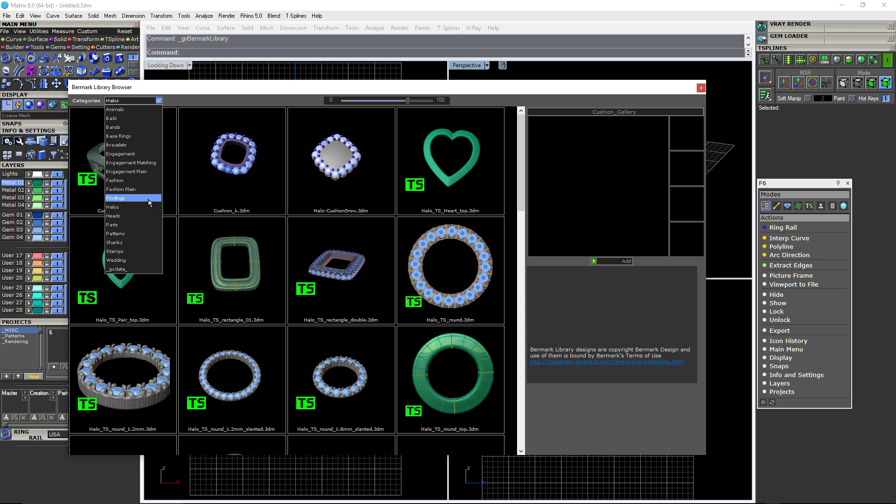So there we go, I have a library. I choose my shanks library and I'm just going to choose a random shank here. Usually I can find one that fits the design I'm trying to make, and if I don't, I'll just make a new one and add it to the library.

First thing, you pull it out and it'll come out probably the wrong size, so you'll have to go in, zoom in, select it. I'm just trying to see what size the other one is. But basically you select it and scale it. Sometimes I'm not as exact like this.

I just scale it to be as close as it can be. Or you can get, like I'm doing here, the right ring rail and scale it from one point to the other. So there we go, just delete that ring rail and it's the right size.

So usually on my shanks I will pre-save selection sets. For example, after you scale that to the ring rail, sometimes the outside thickness will be too much or too little. If I save a selection set on the outside or on the edge, I can easily just scale it up and down and it'll thicken it or not. So it's a quick way of doing it.

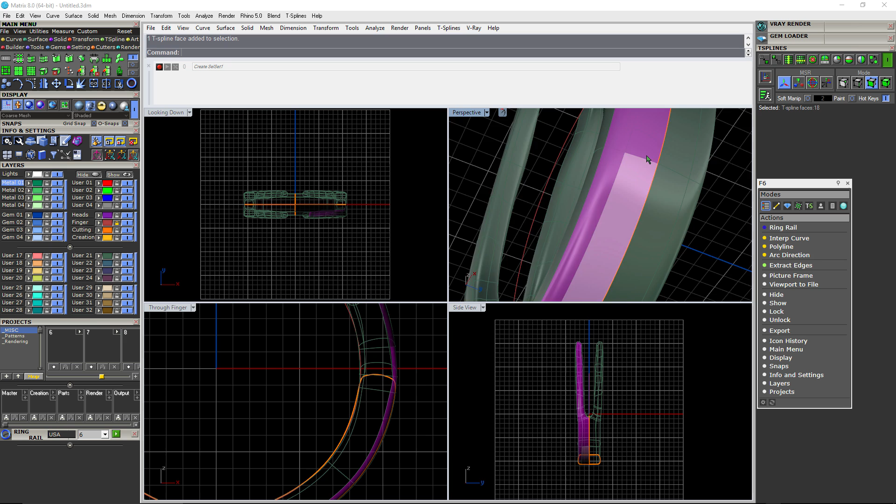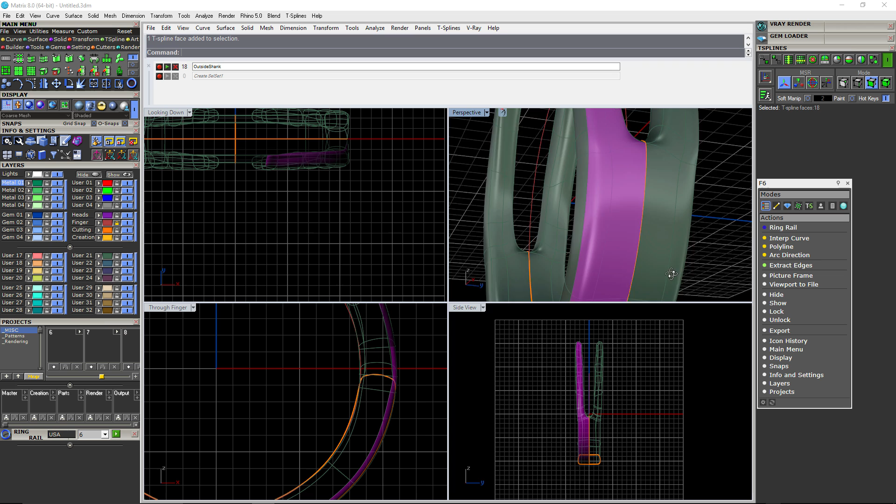As long as you save those, you can pull them out and they'll be with it forever. Or it just takes a minute to redo it if you didn't ever save any. So here we go, just saving it, naming it. Now you just have to go back and push the play button and it reselects it.

So in this case is where I should be scaling it. I'll do a 3D scale or a 2D scale, and usually pull it in. I always have a handy shortcut for measuring, so I can always just do a quick measure of how thick it is. There we go, and hopefully that's good. Let's see, next I'm going to do the selection set.

Oh, never mind, I'm going to pull out a center stone. Usually I'll start out with the center stone before I even pull out a shank, but I'm a little out of order today. So we'll pull out a stone, just something to work around, see what we can do here.

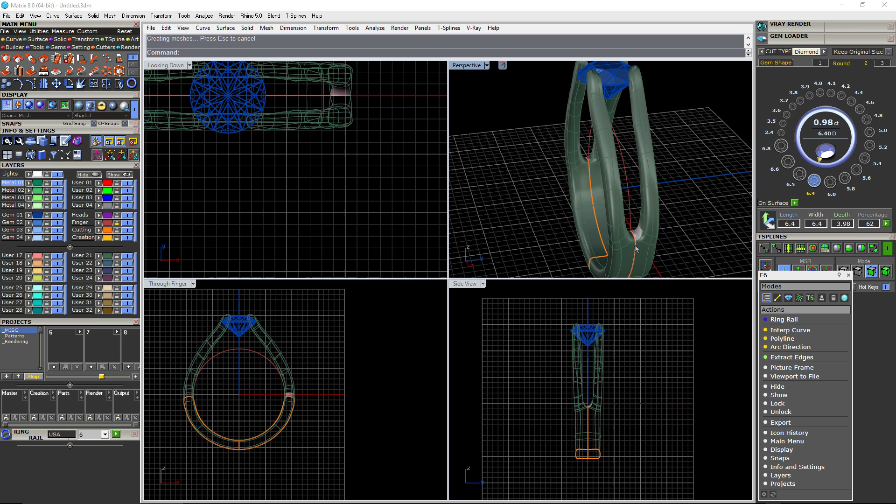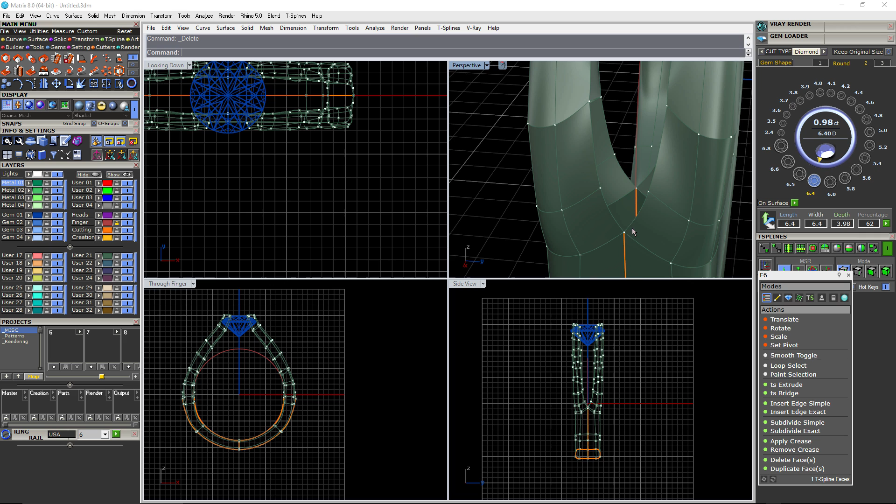Just showing that you can actually take this, and if that groove was in the wrong spot, you're able to select these points, delete surfaces, and then weld these points together. And then it'll just pull it up higher. And then boom, you have that.

And you can just do it so there's a little space between them, or pull that groove way down further. Now I'll go through and show you how to lengthen it. Just select, probably just delete that. You only need to do one side. Don't know why I selected both, but...

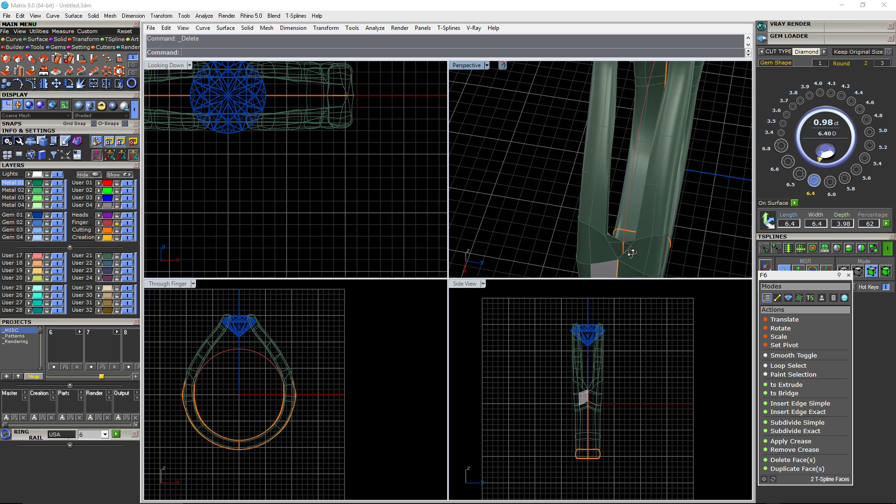This part, because it was connected here, didn't want to come apart, and so I tried a few different ways of unwelding it. None of it worked. What finally worked was just unwelding the edges, not the points. So just give me a minute here to figure that out.

Okay, there we go. Now I'm getting to the edges. Okay, now you can just pull them apart. Another way, instead of deleting that, I could have just taken the edges from the beginning along that symmetry orange line and just unwelded the edges, pulled it apart. Probably would have been a lot quicker and easier. Now I have to go back through and add a surface there.

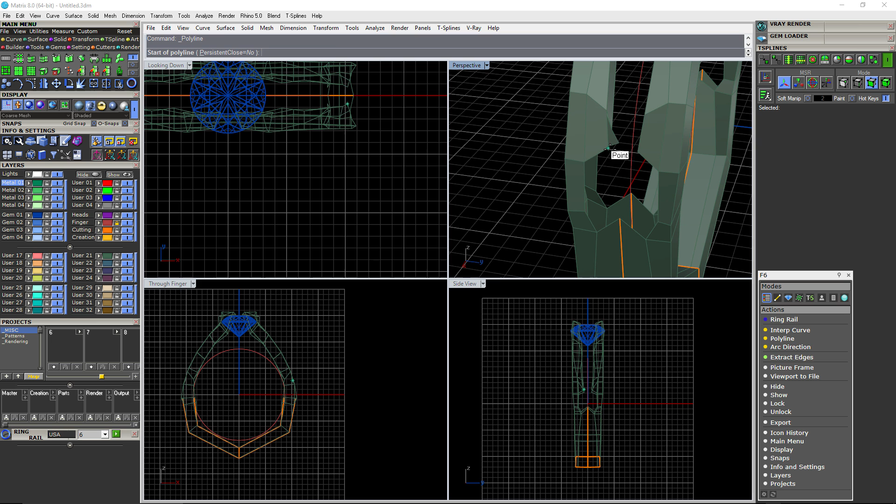Sometimes, oh, this one, yeah. I think I was a little confused here. How fun, how fun.

When I just sit there and look at it and stare, I'm just kind of thinking and trying to figure it out. So what I sometimes will do, if there's multiple surfaces I'm going to append, I'll just draw a line and then I have something to snap to when I'm doing that, so it's not like in midair. There we go, and then you can delete that little line after. So I'll have to draw another little line here.

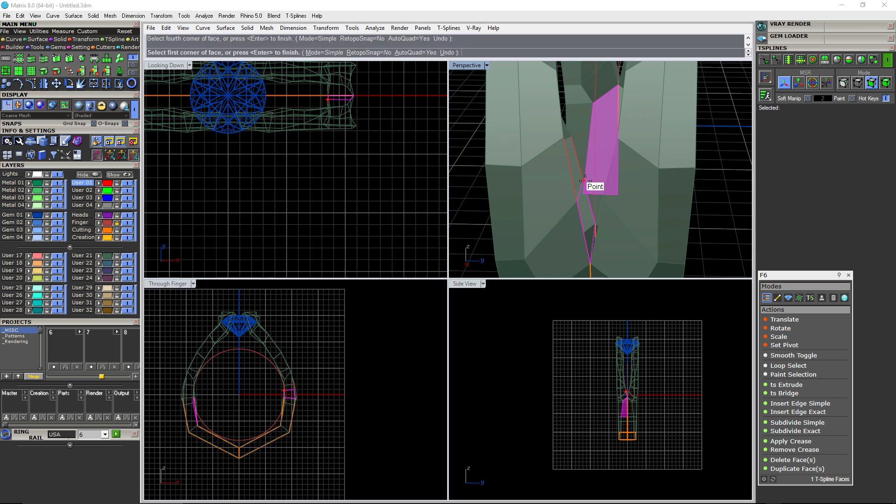The next part's easy, just seal up the next section and then the last. There we go, smooth it out. So you can pretty much bring that groove up and down as far as you need it. Next, I think I'll just add some stones and maybe a bridge. Probably the bridge. Let's see. No, I'm going to thicken it.

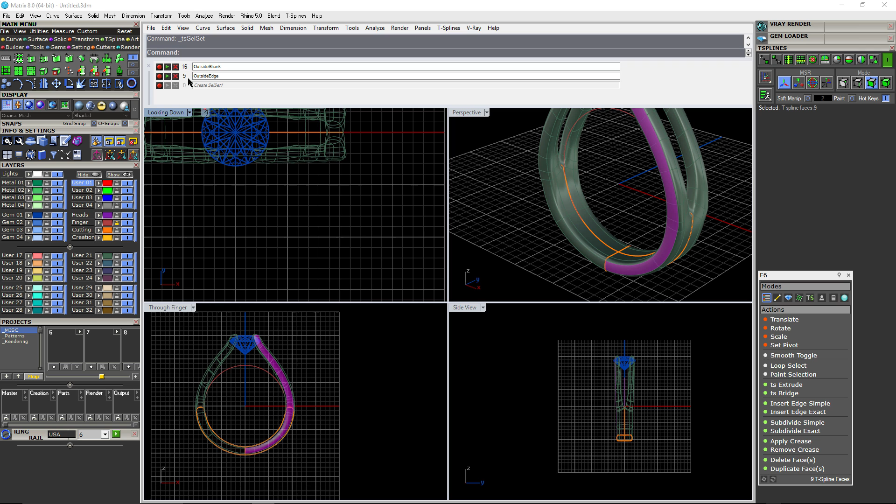So, like I said here, take the edges, save the selection set, open it up, push record, name it. Just going to name it edge. Let's see. Nope. That works. Okay, so take it, select it. I'm gonna export it back to my Bermark library.

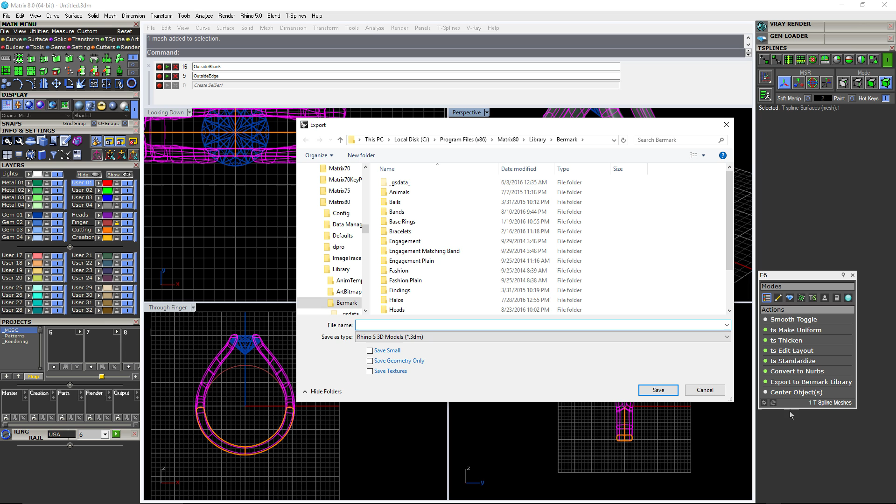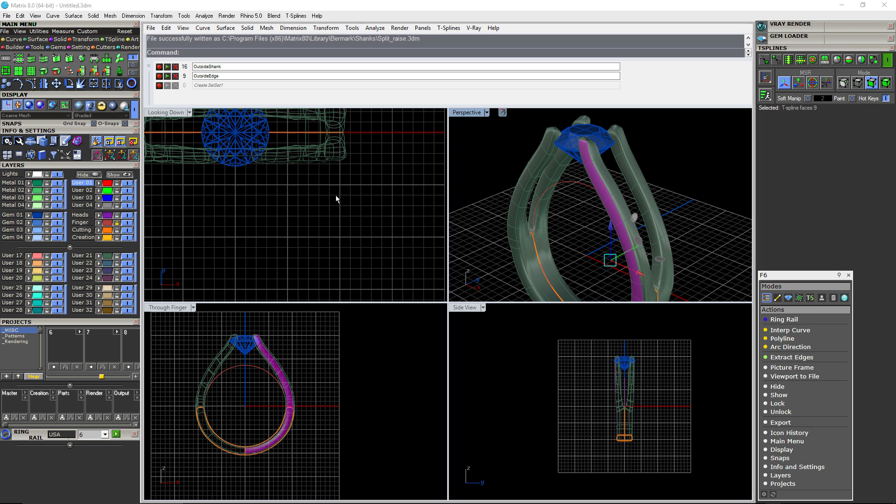Now, in those settings, you can actually tell it where to bring up your library. I already have that set up. So anytime I have a T-spline selected, I can just select it, push export to library, then the Bermark library, and then I can select what folder I want it in. And that's where I store all my library pieces. It's a great way to keep things organized. I wish they would implement that into Matrix without our little workarounds, but I'm glad I can do the workaround. Saves me.

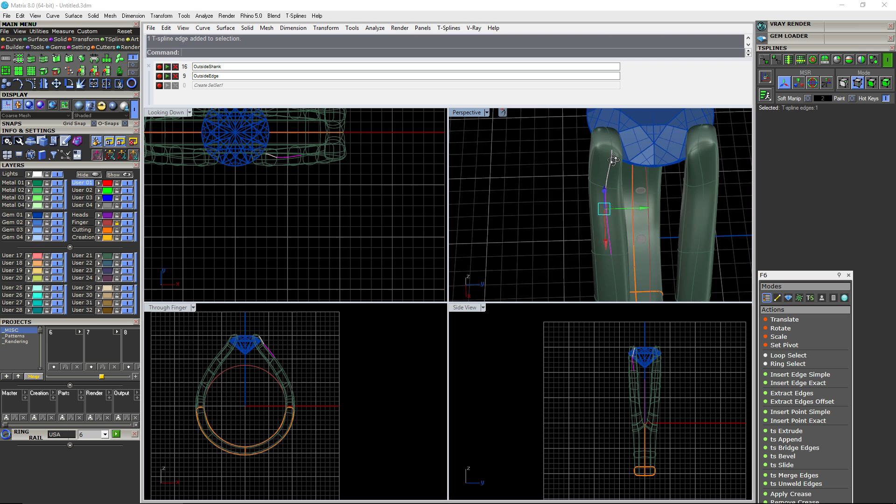So there we go. Now you can just pull that out, thicken it. Taper that a little, try to straighten things out. Little detail work. And that's the fun thing with T-splines. You can just pull it, push it, get it to where you need it. Selecting edges is always great. In this case, I'm just doing small adjustments, but if you need to, a lot of the time I'll just select one edge, hit L to loop it around, and then you can adjust the whole area around. But right now I'm just kind of doing edges.

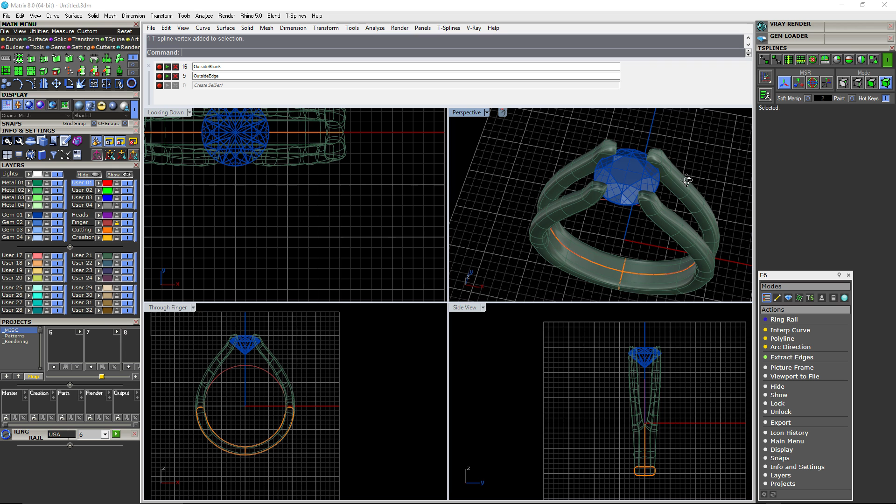Since I'm going to be adding stones, I'm trying to get that center line right there in the middle, because that's where the stones will go. I'm just going to use it for a guide since it's not quite perfectly in the center. Sometimes they are, and you can just roll with it, but in this case I'm going to extract the line and then rebuild it and adjust it where I need it. Kind of going back to the top area now, but I'll get to that line, I promise.

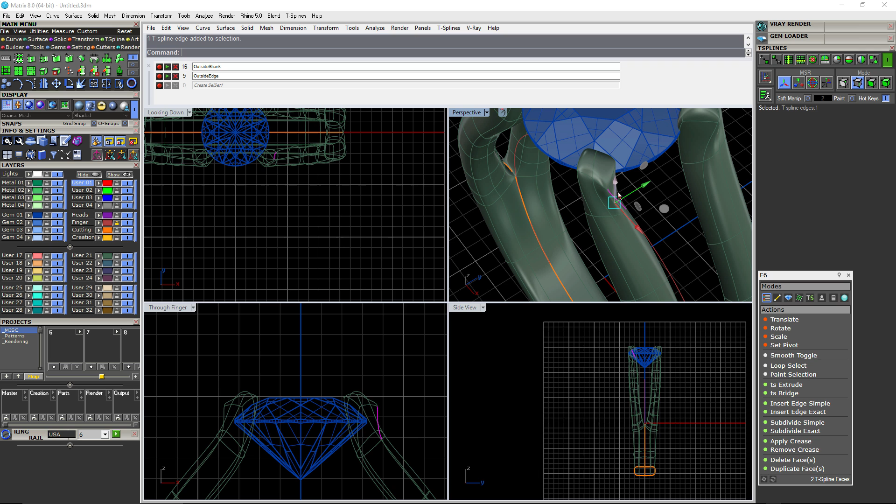Okay, let's take that and probably just twist it now. So it kind of twists up, lands flat up on the prongs. There we go. Adjust the top, make it nice and neat. If it gets all wonky and it's not perfectly how you want the prong, you can keep adjusting and playing with it, or not care, or just make it taller and whack off the top, however you want.

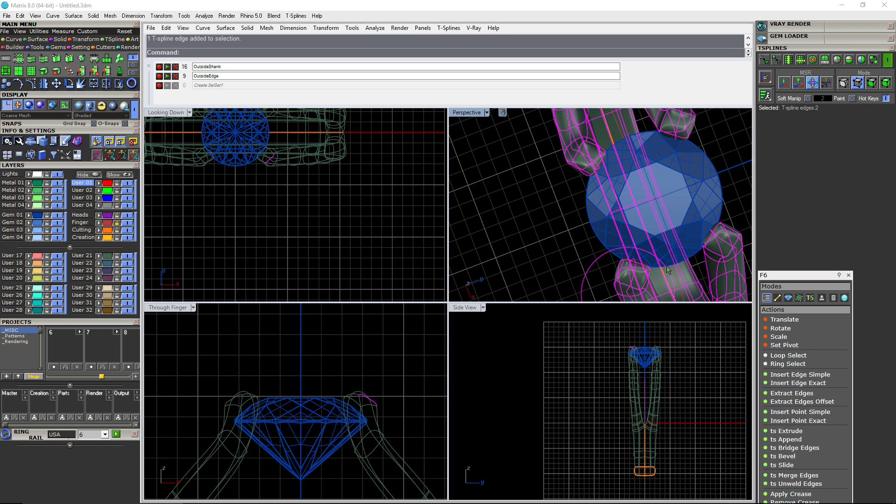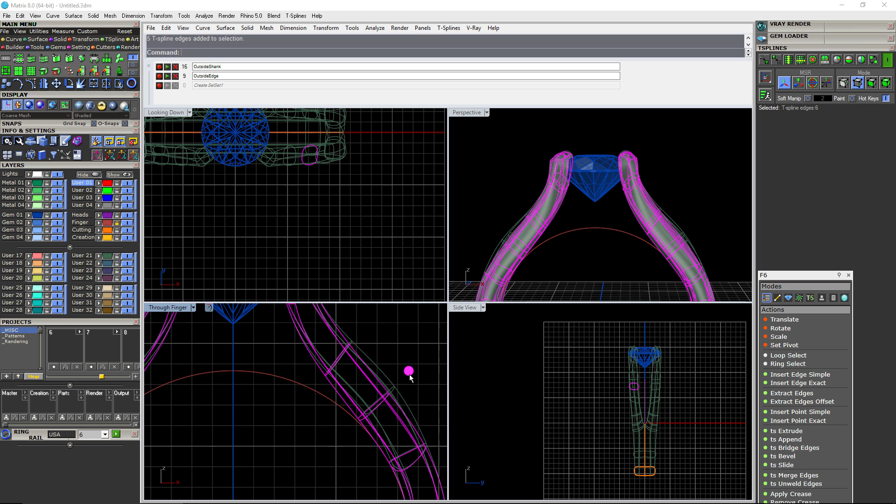If you're really picky too, it's possible, even after you're done with the ring, if you have like ZBrush or something, to bring it over there and just sculpt the top a little bit and make it exactly how you want it. Very flexible if you can bounce between programs. But in this case, I'll just show you this adjustment. So there's where I select it, push L. And then now I can just adjust that. Same goes with there. Pull it in.

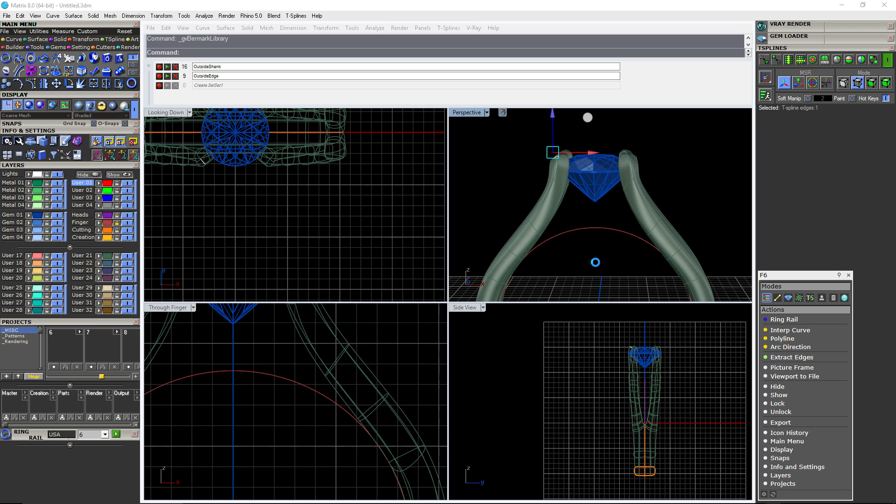Now what's missing? The bridge. Let's go back into my library. Go into my parts library. And I have a bunch of different bridges available. Since this is kind of slanted outward, I'll use my double bridge. And it's already close to in range. This one, not sure if I saved my selection sets on it.

But usually when symmetry is on two separate pieces like that, you can't just select it. It'll select both pieces, so you have to select just the surfaces. So I'll probably lock that green side so I don't select them. Then I can just select the surfaces on one side since it has symmetry on, and then I can scoot it over.

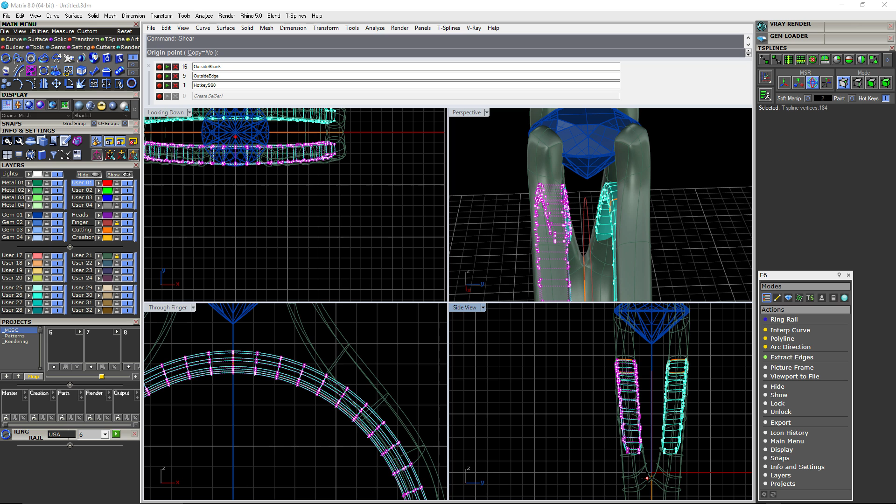There we go. And the best way, instead of rotating, because that'll cut into the ring rail, the best way is to do that. Turn on the points, take off T-splines for a moment. Type in shear, and then you can select up and then just shear it whichever direction you need it to go. That way it'll keep the inside ring rail pretty even and clean. And just turn on T-splines again.

I always like to work in the darker green and blues and those colors. Usually I always use those colors instead of the middle 1s and 2s, which are the bright greens. Just easier on my eyes.

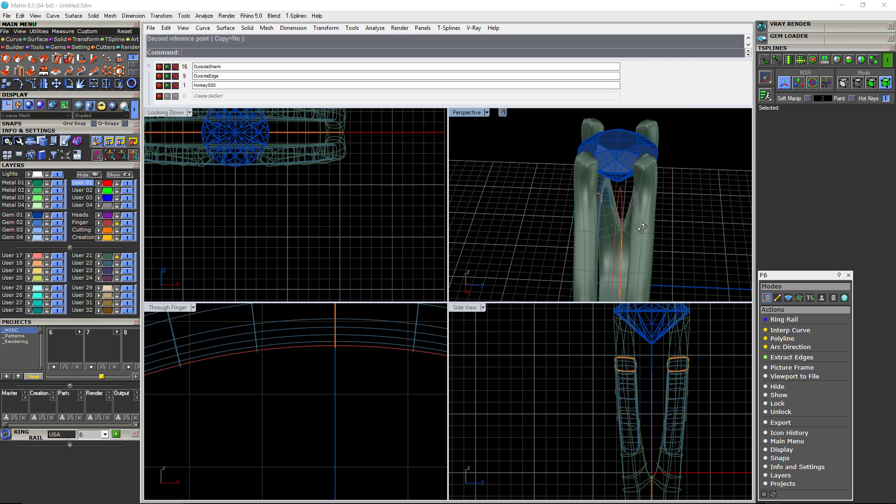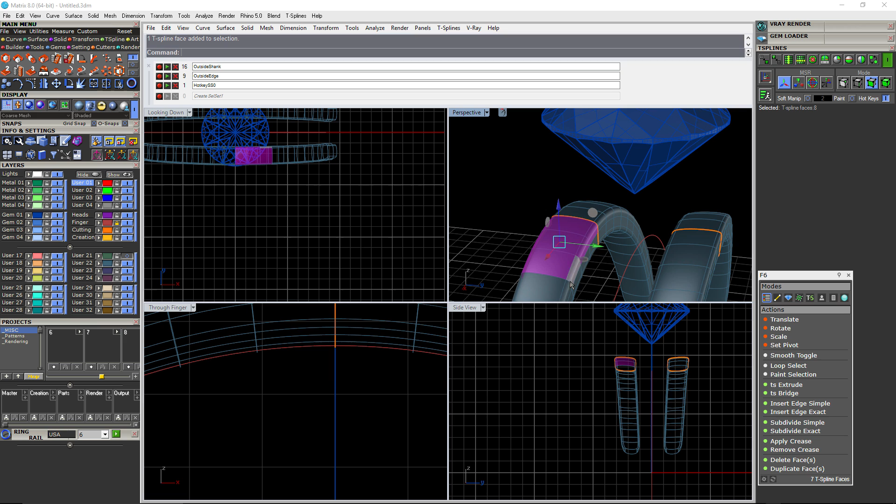So yeah, here we go. See if you needed to thicken that bridge. See if I have it. Nope, I only had one selected. So yeah, I need to go back through my library and pre-save these. But for now, since I don't have it, I'll have to go through and manually select it again. So I'm just going through, selecting the top half. And remember, save your selection sets. That way you'll always have them and you won't have to keep doing this. It saves so much time.

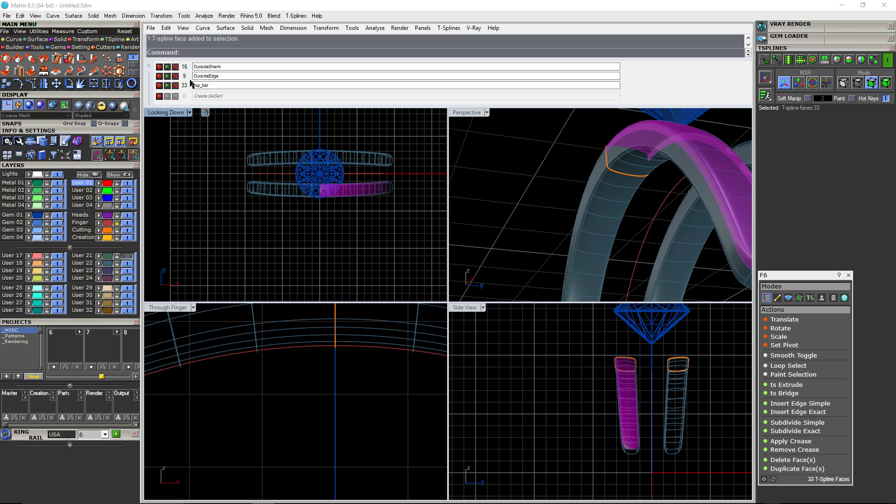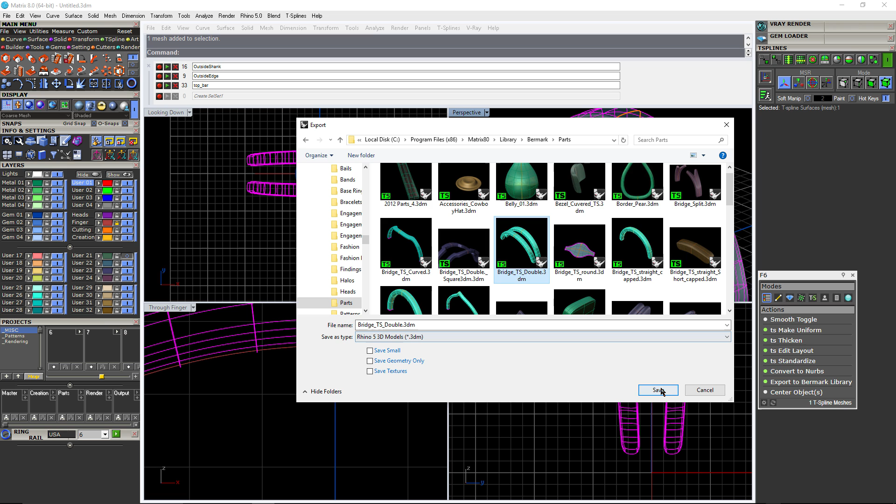So there we go. Save it, name it. I'm gonna save over it. That way I have it saved for now and for always. There it is, just save. There. See, it's been a while. I had to convert it to Rhino 5. It's been a while since I've re-saved over that.

So now we've got that. You can just scale it. So like check the thickness. If it's not the right thickness, just do a 2D scale up or down, depending on how thick you want to have it. And then you just go through and recheck the thickness and you're good to go. It's probably good for this demo. I'll pull that on, got that going.

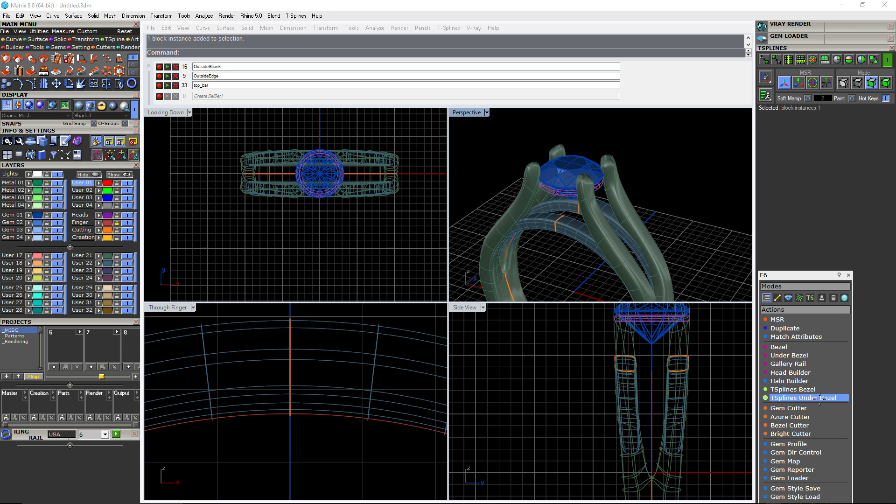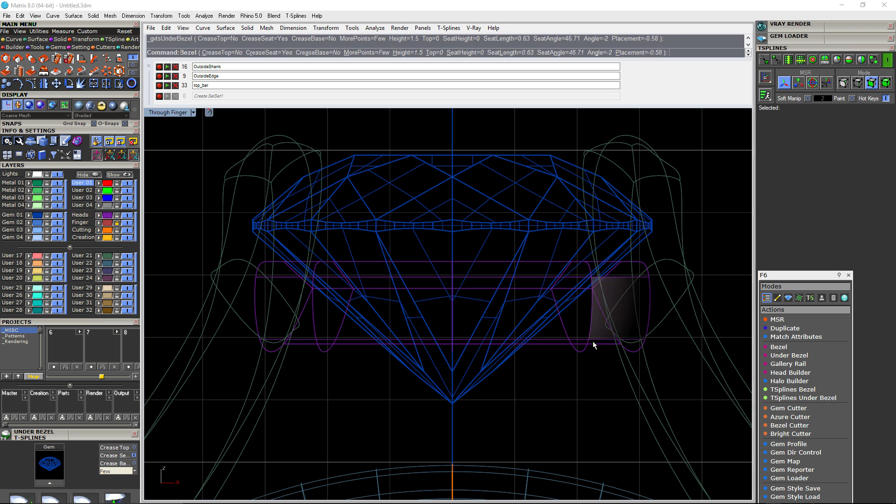Now that needs a little under gallery, so we're going to use the T-spline under bezel here. And the good thing with T-splines is it's so easy to adapt even after that. It's just like the head bezel builders and all that, but you have a little more freedom. So don't worry if you want it more rounded or if you want it sharp on some edges, you can easily tweak it to do that. So I'm just trying to get the angle of that seat just right. Now you can change and adapt the thicknesses you need to. So looking pretty good.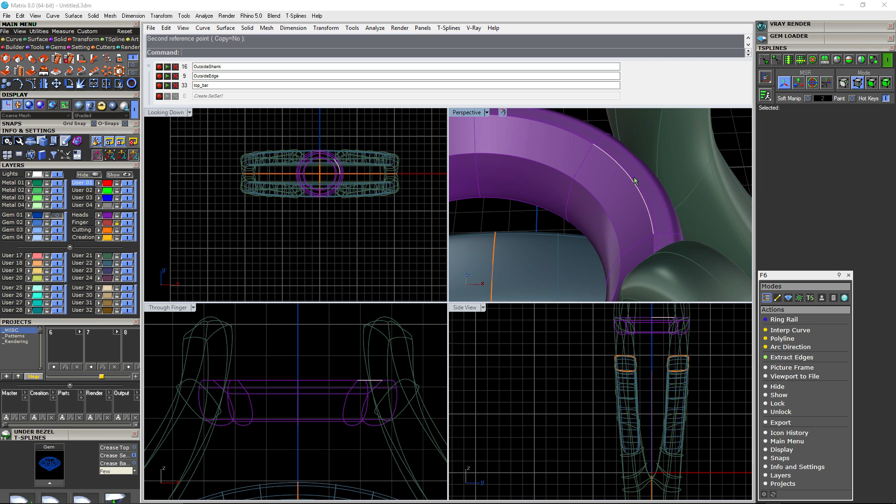I'm going to select the edge, L, to select all the edge. Now I'm going to 2D scale it in to thicken up that bottom a little bit. There's an extra thing just from the builder right there that has an extra edge. I'm just going to delete it, create a smooth edge there. And I'm going to take that edge, scale it out so it kind of goes into the prongs a little more. Got to make sure from the top view with the stone it doesn't go past the stone.

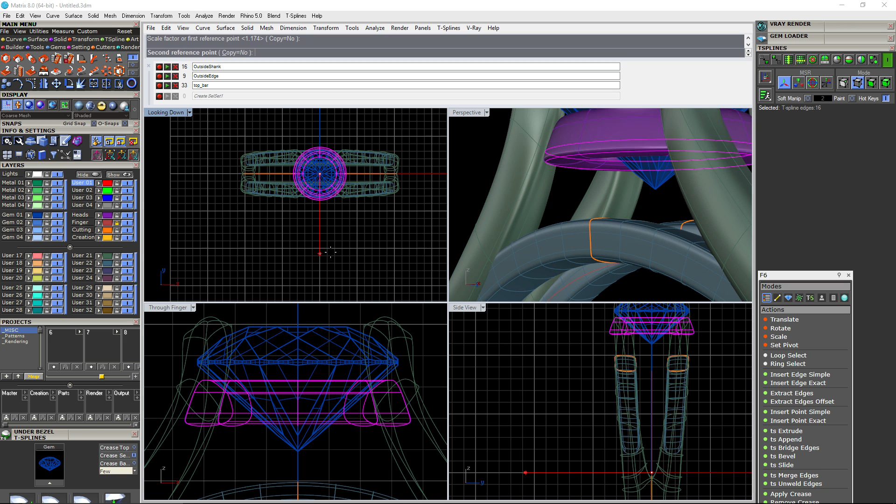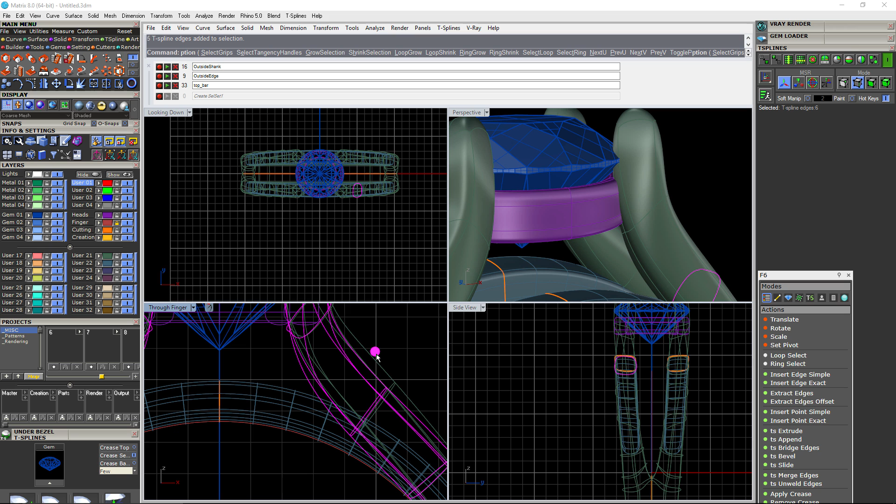Okay, looks pretty good. Let's square up the bottom if you don't want it totally round. Make it a little more like the rest of the ring, kind of squarish. Just select the edge. We're going to insert an edge. It kind of pulls that out. So we'll just pull it back in a little. And we'll 2D scale that in just a little bit. It's probably too much. I guess I'll take that, select L, pull it in. Pull these in, continuous adjustments, refining it to how you like it.

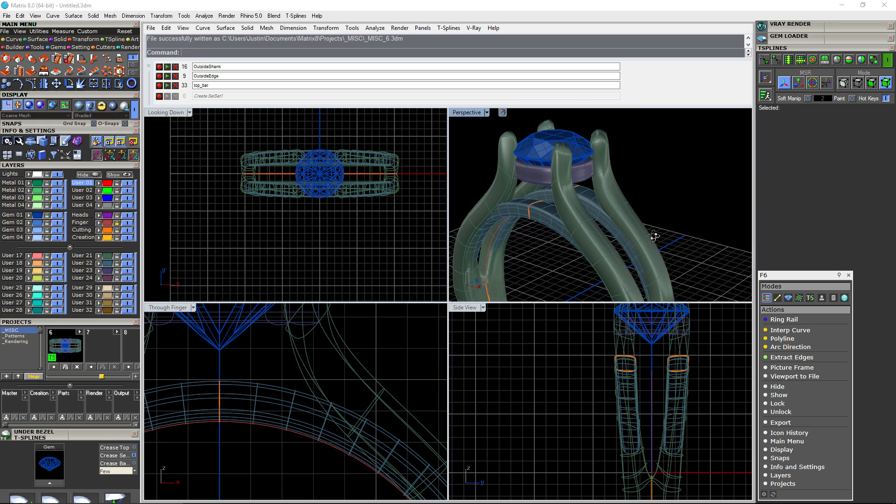Okay, now we will take it, and here's where I think I'll, well, job bag it just in case. Usually I job bag quite often, but I haven't in this demo at all.

Okay, I'm probably going to pull out that line now. So select the edges in the middle. You can either just select them individually or just push L and get them all, and then unselect the ones you don't want. But I'm only going to just go down like a little ways, so about down to there. So now you just look for and extract edges. Okay. Now I'm going to take that edge and rebuild it. I'm going to go into more of a compatibility mode here.

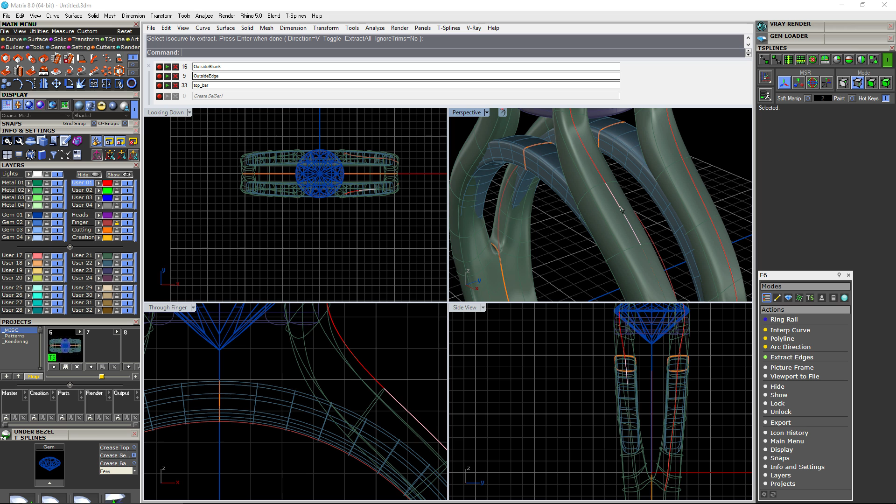Just checking if you can also extract isocurve. That's another way of doing it, if you're in the right compatibility mode. If not, then you can't extract a curve on a T-spline. So that's another way. If that line is in the middle, it's quick and easy to do it that way too. Just showing you multiple ways of doing it. So here we go with that.

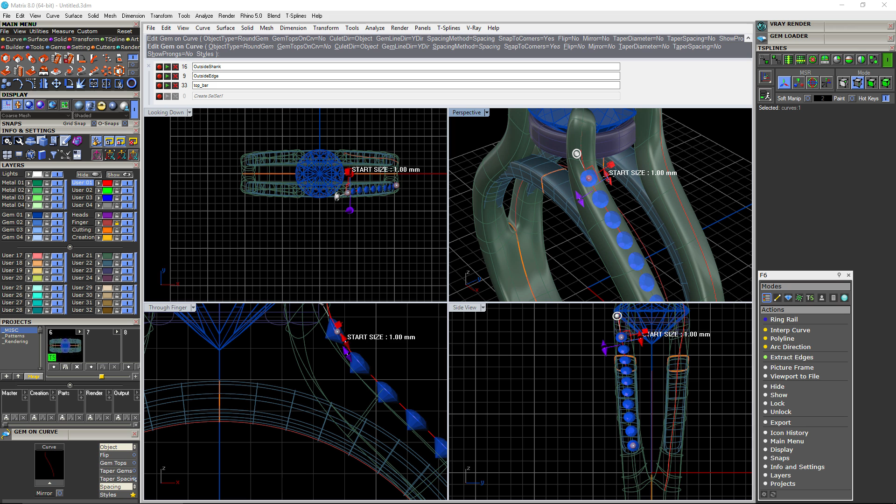I guess I'll throw in the stones, gems on curve. Bring that down a little bit. Size to fit, and this is where you could actually do it in a few different ways. Once you get the stones laid out with the size that you need, if you had to, you could reselect the edge of the shank and thicken it depending on if you need a certain size in there. If not, it's always easier to just go with the flow.

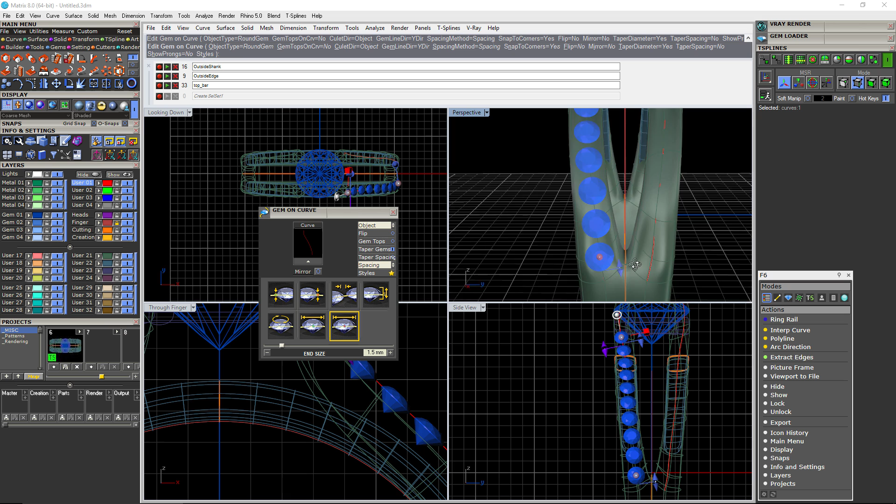But basically, put it in there, and then the way I'll finish it is to cut out a space for the stones so they're just kind of on the surface with the prongs. No border. But the other way would be to actually create a cutout so it leaves a little border so they're almost like in a channel, but not a channel set, a very low, thin one that the prongs will be in holding the stone.

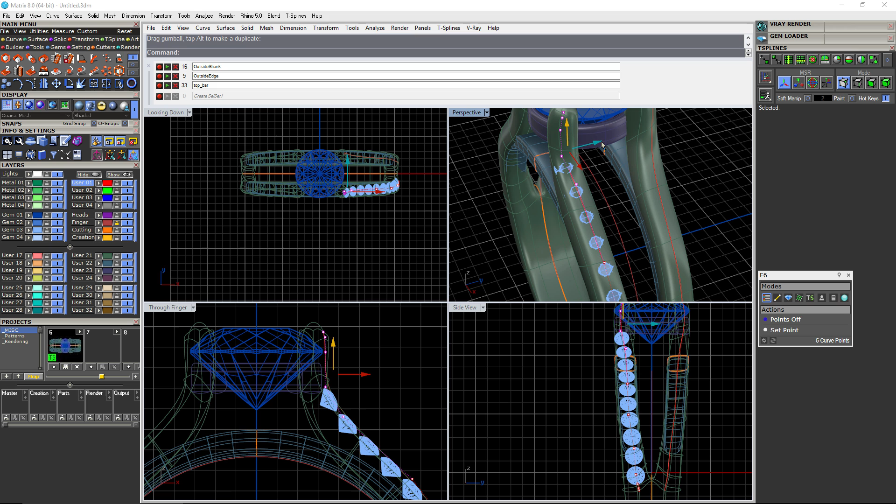So yeah, you can do it in a few different ways. I think I'm gonna just adjust that line. So we gotta turn off the T-splines, otherwise all the points come on when you turn on points. Now I'm adjusting the line after I rebuilt it. And then once you just edit it back in the gem on curve, it readapts to the surface.

So anytime I'm doing it without the channel border, you still have to leave a little metal past the stone. You don't want to have the stones just sticking out in space. Since my line wasn't perfectly in the center, I'm going through and just adjusting each stone individually. It doesn't take too long, but that way you get them in the exact right spot that you want them.

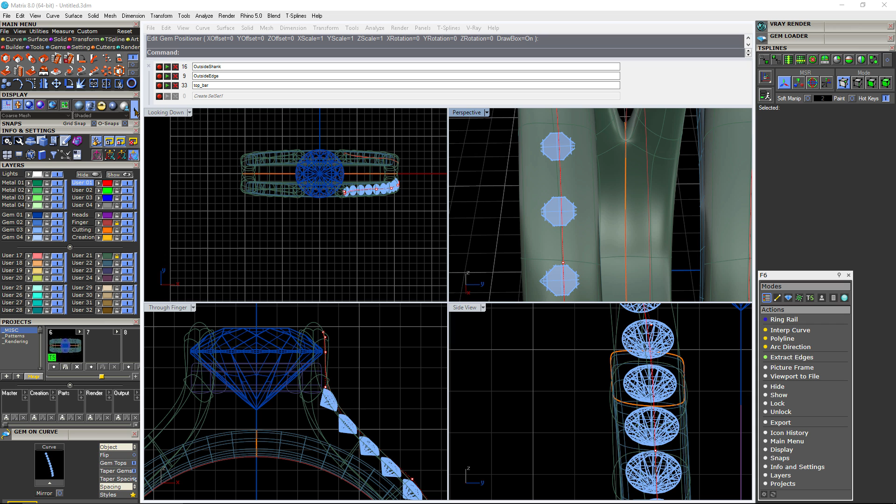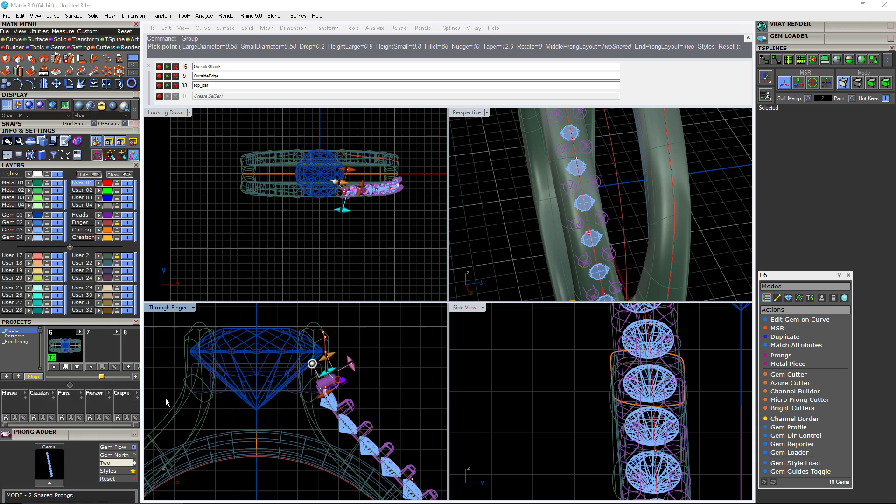Sometimes I'll just select them all and then you can see them through the surface, see if they're in the right spot. Looks pretty good there. So next, add some prongs. Usually I'll have a few styles, but they're all at work. Usually I'll have a big library of those presets, but since I don't have them, I'll just do some quick adjustments on them.

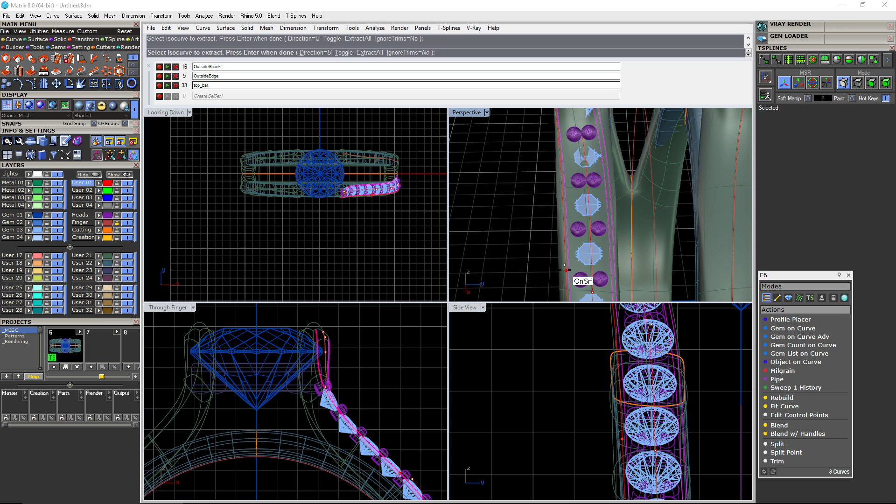But style sheets is another powerful tool in Matrix. It's great to be able to do that. I hope someday they'll develop it more, make it a little easier to use in this area, but it works and that's all I need for now. So if I was going to be adding the edges, this is how I'd start, but in the end, there wasn't really enough room on this one. I could have widened the shank or put smaller stones in, but you can see how it goes around the edge. It's not going to create what I wanted.

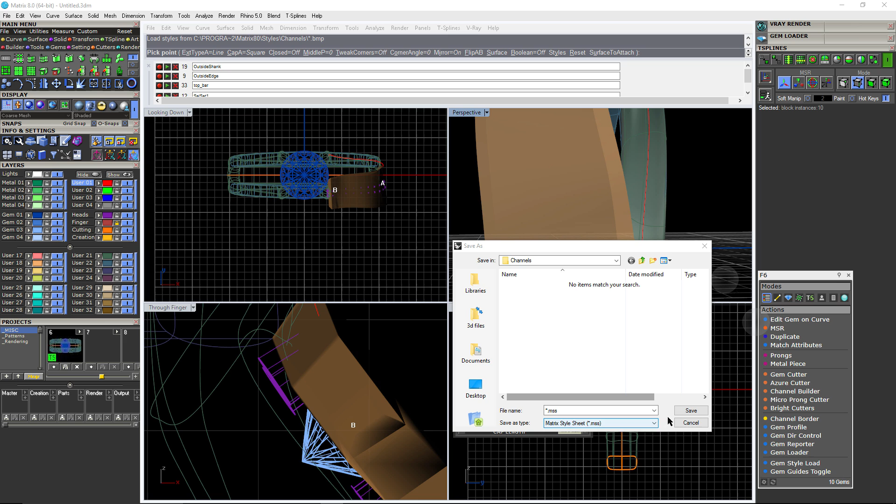So there is a method of cutting that out, and I deleted that part of the video. In T-splines, you can sometimes just create a few lines on the end and then pull those surfaces down instead of cutting it, and it creates a nice cutout for them. But it didn't look pretty in this case, so I had to delete it. I'm just saving style sheets right now as a number, so I could just click number 2 and it'll pop up.

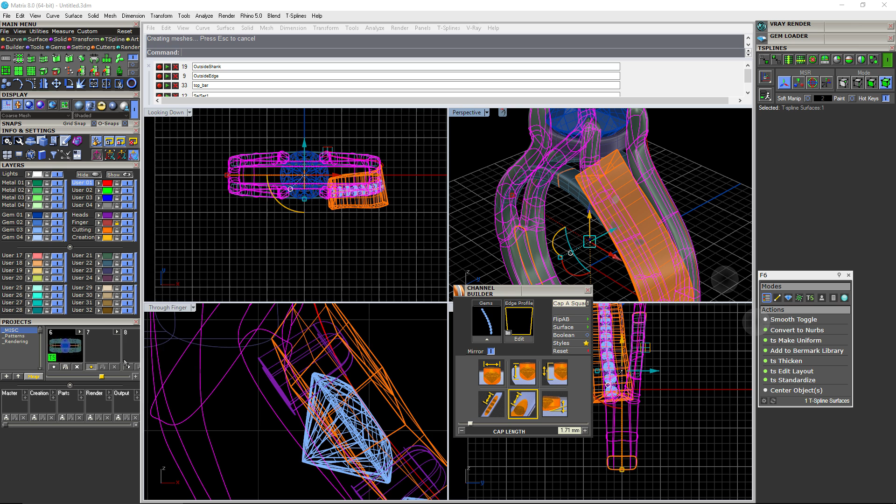So I deleted that T-spline surface and put the old one back on, and now I'm doing a cutter. Channel builder, make it low, just below the girdle. Then I widen it super wide so it'll cut through the shank. There's the original shank. It sticks past the halfway point, so I'll take a little box and cut off that part. You pretty much do a quarter of it, and then you can just mirror the other sides.

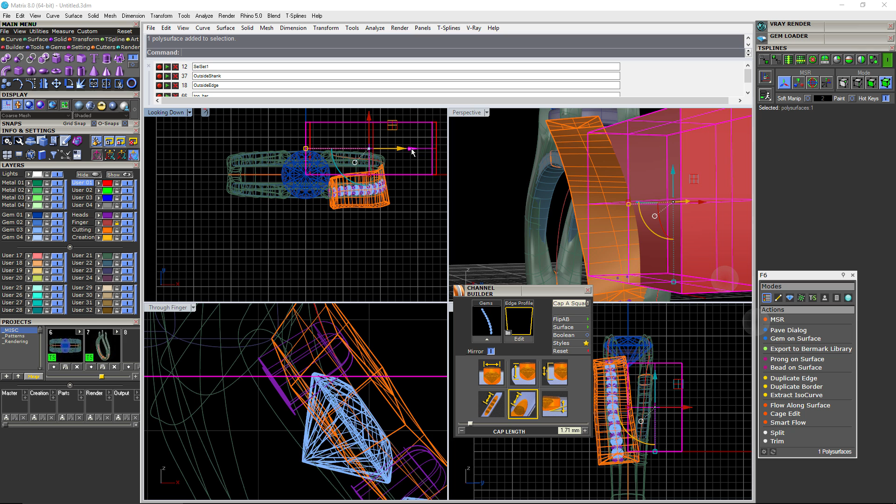So first, do it from there, pull it up, make sure it's in the right spot, pull it down, then just Boolean difference, then you can mirror that around. Or you can do one side and then cut the whole shank in quarters and flip it around. Either way.

Now, for some odd reason, usually I can always take a T-spline, Boolean difference, and it converts it to a poly surface. For whatever reason, because it's a tutorial, it wouldn't do it. So in the end, I had to convert the shank to a poly surface and then do the Boolean. Here you see me trying: why isn't this working? Don't know. One way doesn't work, you just try another.

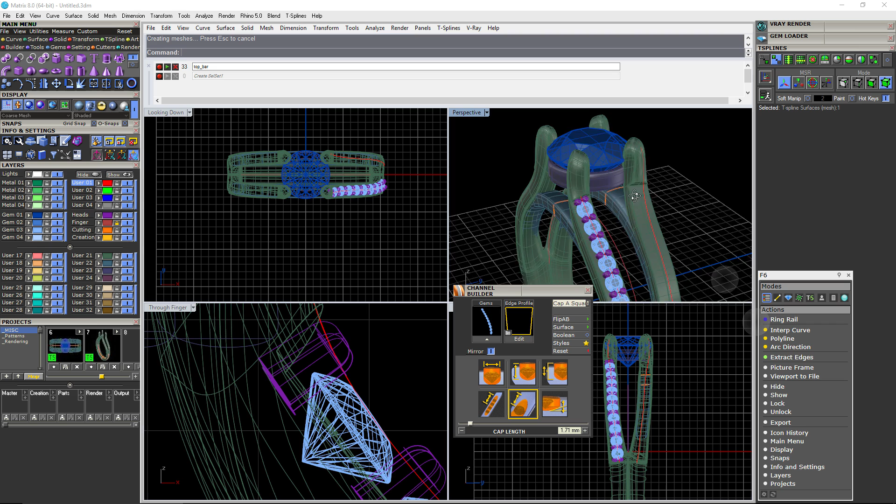And I usually will always save the shank in a job bag right before I convert it. That way I can always go back to that shape right before I cut it if I need to make some adjustments. So there we go, we got some prongs on there. Don't worry that the metal sticks past it. That's actually pretty good. Just a little bit.

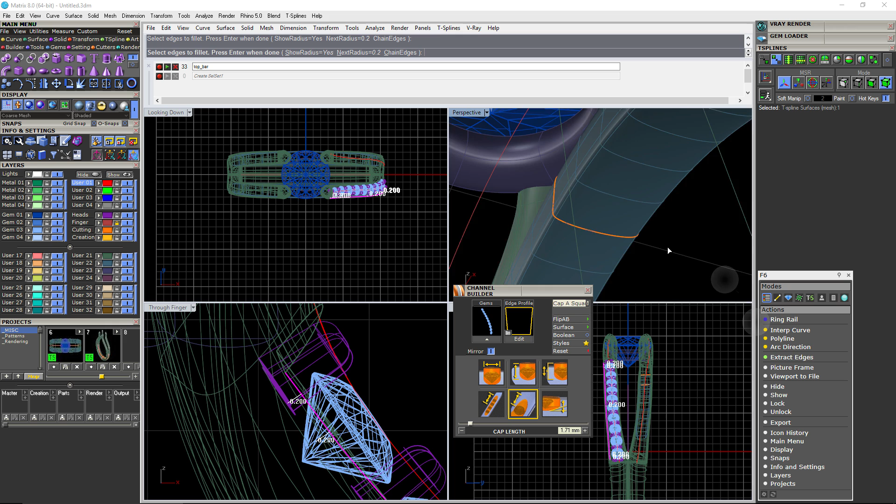I'm trying to, right here, see if I can round those edges right there so it doesn't look so strong, but usually it works, but it doesn't always work, and in this case it's not, so I'm not going to play with it, just leave it like that.

Cool thing about this too is with these stones and prongs, you can always adjust a stone individually and the prongs will kind of move with it. So right here I'm just kind of setting up, if you want, kind of like that U-shape cutout in between each stone. It'll create that effect. I usually also have these saved as a style sheet. So I just click it and go, but since I don't do this at home, I don't have it saved. So I'm kind of creating and saving it.

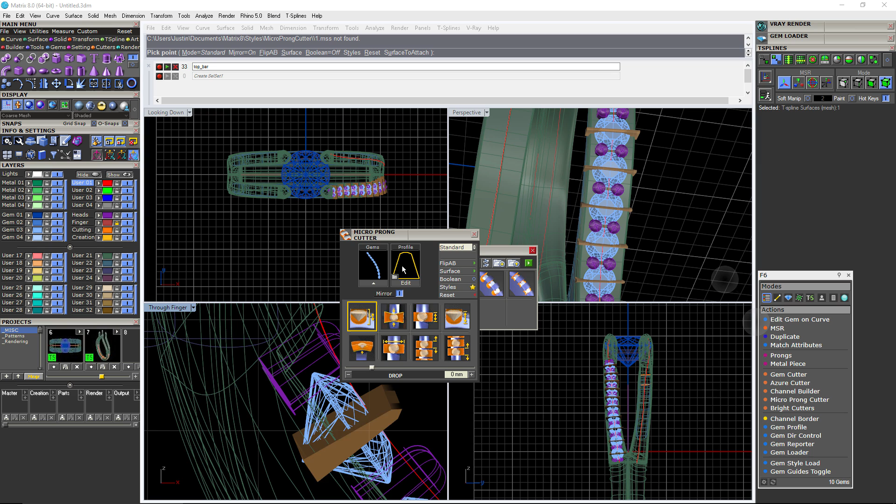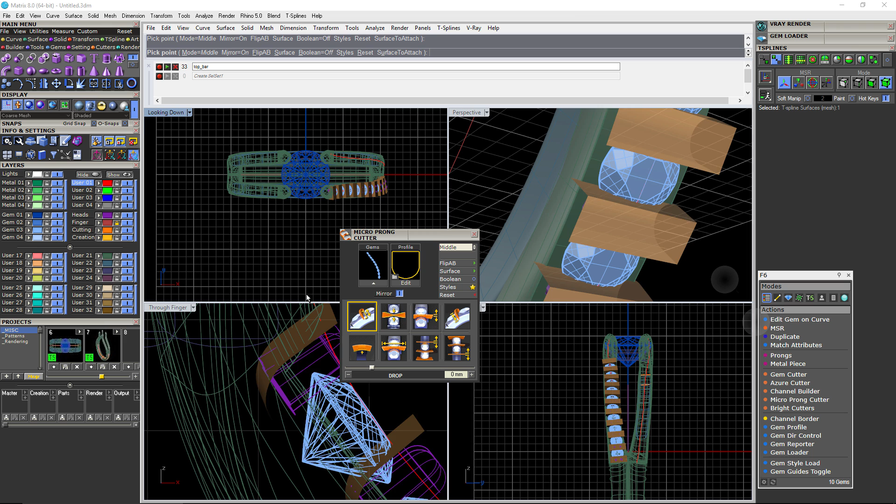So here's how you set it up. Look in here. Okay, trying to figure out, hey, where are all my style sheets? Dang it. So that's not working. We're gonna do the middle cutout. Gotta find a new profile. Gonna first move it to there. I thought, oh, in the middle, no, oops. Gotta move it back. Yeah. Now adjust it to the width. See, once you get these things set up, then you just pull them out.

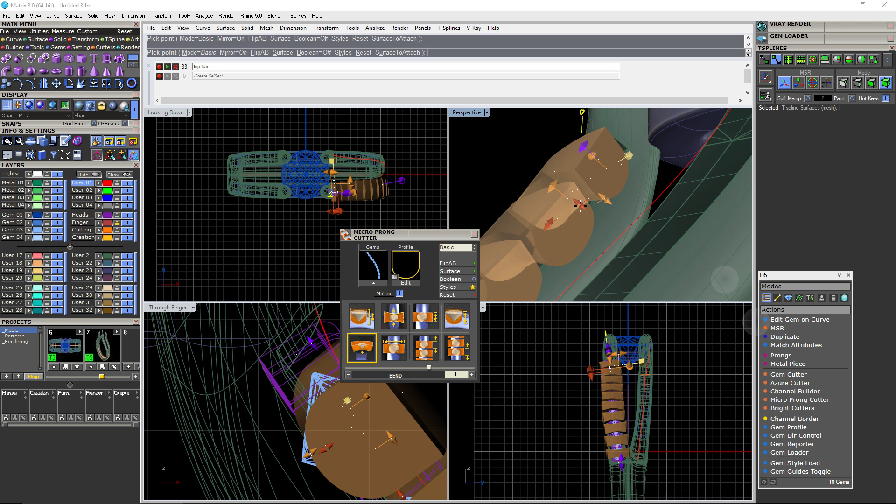I'm gonna bend that middle in, and then I'll kind of bend the middle up, in, and then also up, so the whole thing kind of extends past it. I'll save it. A little wider, and I think this is where I push the middle up. There we go. A little bend in that middle. There we go. Now I save it. Just save over it, probably. And then now it's set up for future use. That's how you set up your style sheets.

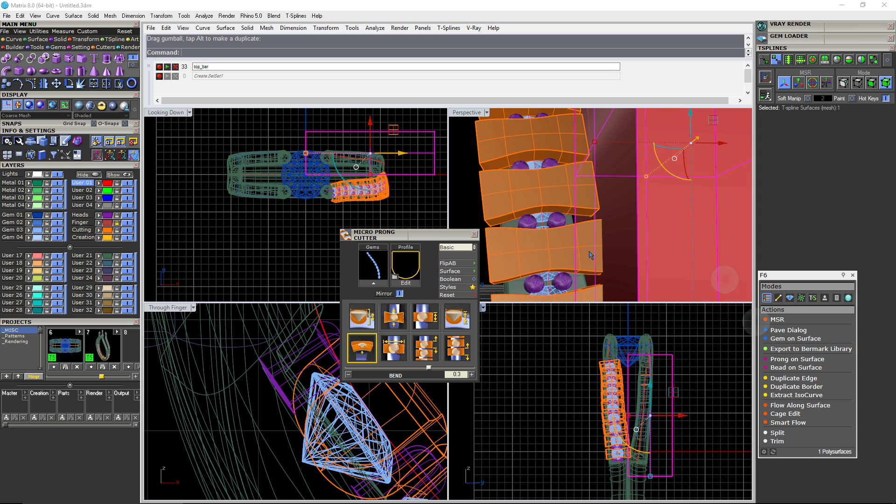Then you just come here. I'm selecting both that bridge, because once I cut this, it'll probably go through and cut. If I don't cut the bridge with it, it'll show through. But first I've got to take this block again, cut that midway point so they don't run into the other part of the shank. There we go. Now I can mirror that. There we go.

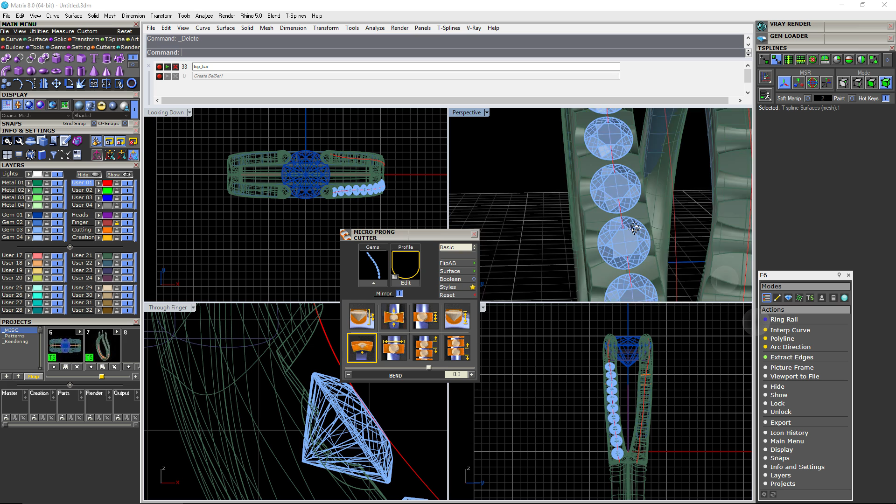Then I'm gonna change this, I think, from single prongs to 4 prongs per stone. And yes, I have some style sheets saved there. Now it's just a matter of adjusting them. And then match attribute to that stone, and boom, they all fill in. So now I'm just kind of adjusting that line. Never was straight, so just gotta make some little tweaks to it. Didn't like the height of them, so I'm just readjusting, deleting them all. Now readjusting the one.

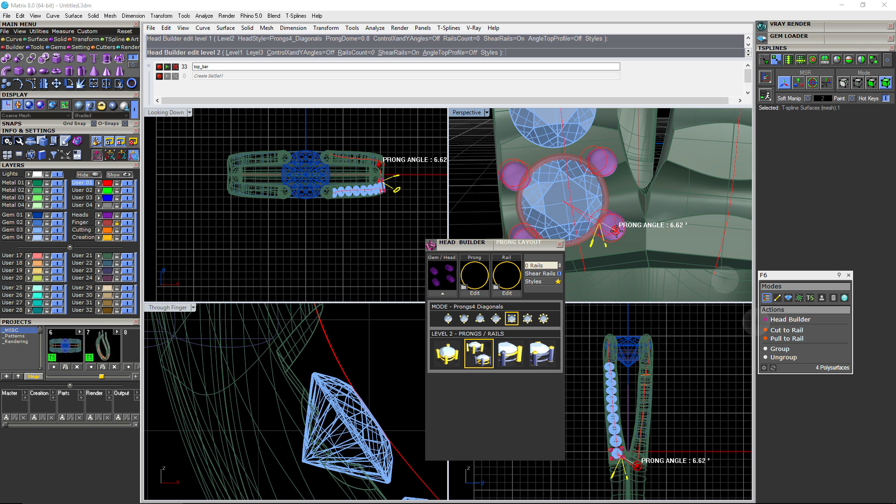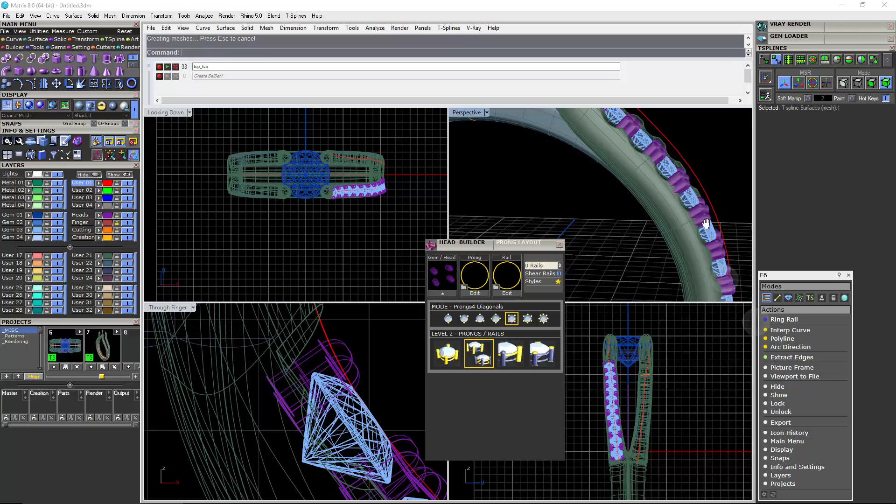Once I like the height of those prongs and where they're at, so they don't stick off the edge, reselect them, match attribute to that one again, heads, and redo it. Now those prongs touching, no big deal. In the middle, you can easily take the engraver and a flat graver and just split them when you're setting. So don't worry about that. You can pretty much just mirror those around.

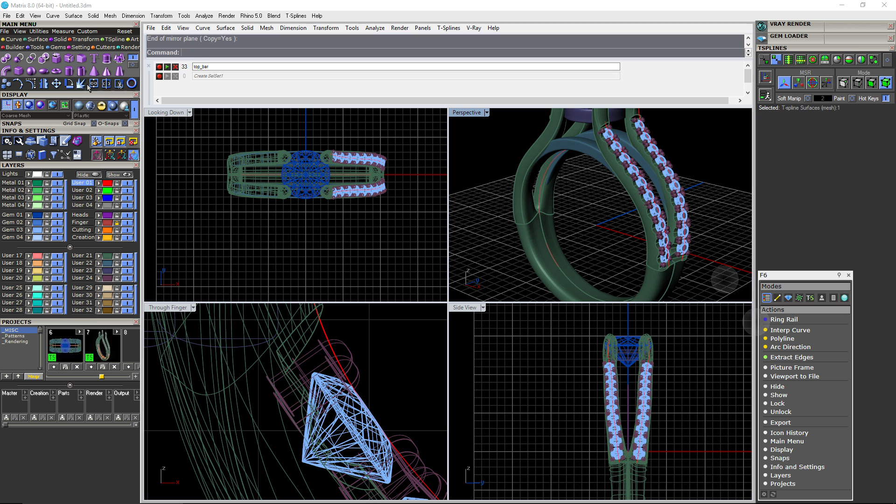Again, probably just right click on the stones, and then the prongs you can mirror pretty easy. So here, instead of doing that, I'm going to just split the shank in half and then mirror the shank over all that whole side.

I don't know why I changed it to blue. Must have been a reason. And just join them together. There we go. Now, hopefully I do this last little part of adding the cutters for the seats for the stones. I guess not yet. I'm gonna just skip that part.

I don't even know if I do that in this video, but for now, I think I'm just talking about you can go into your patterns library and maybe just find a pattern. Now all these patterns are cool because you can adapt them and change them to what you need and keep adding as you go. You can just keep adding to it. But here we go. We'll just do a scroll. It's just to kind of get an idea what you can do.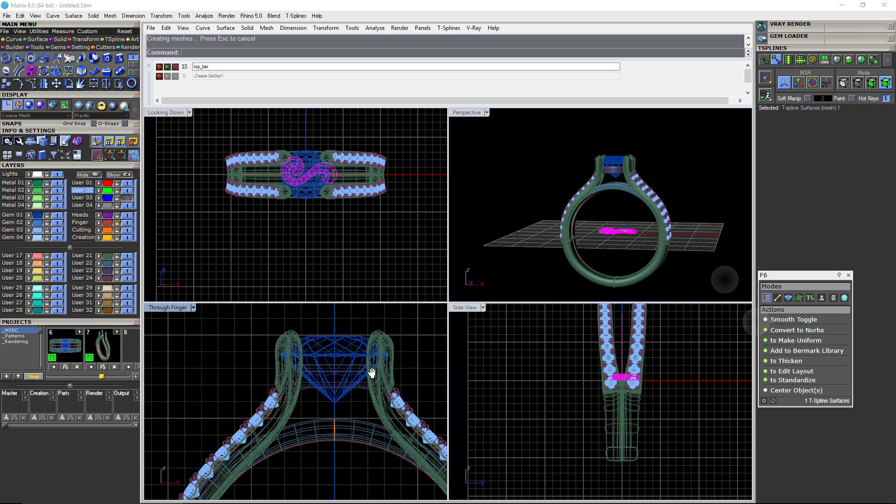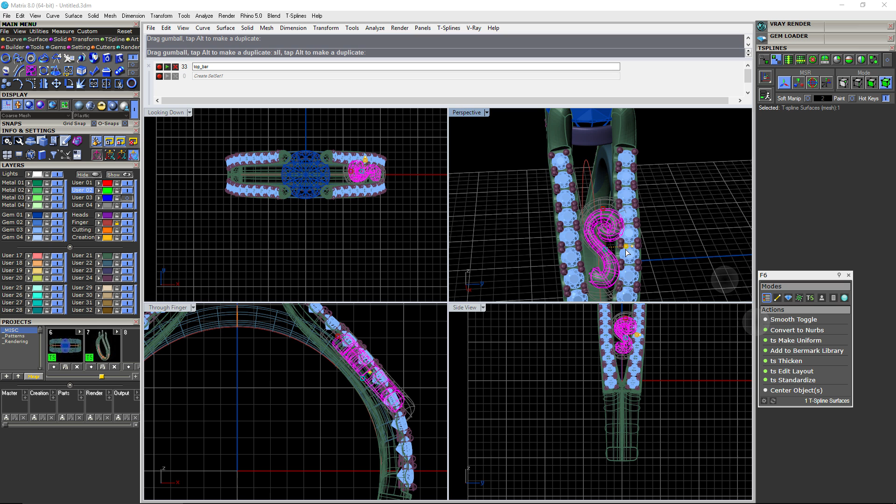Take that nice little scroll. We're gonna just not even surface flow on it, but we're just gonna take it. You could just bend it or just put it in there. Right now I'm just trying to do it in place instead of trying to do it the other ways, but you could easily build a dummy surface, extract ISO curve on each end, or something like that, and then just build a quick surface and then smart flow your objects to it.

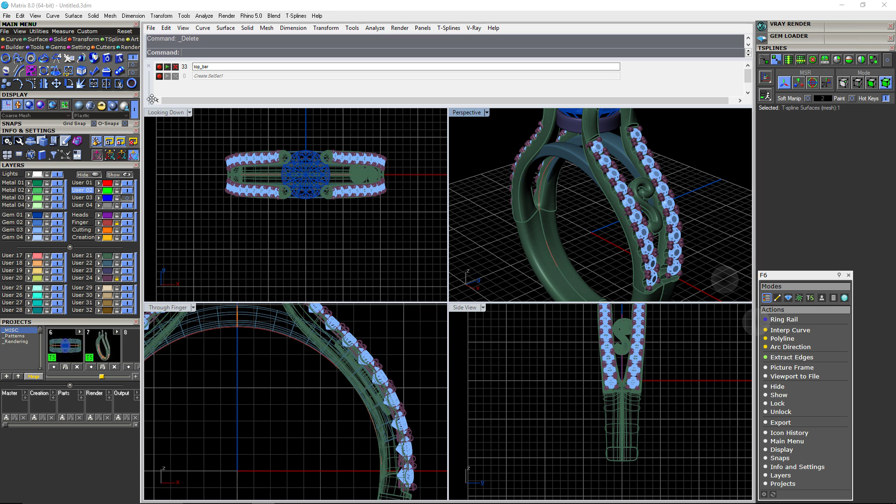Would be pretty easy, but in this case I'm just doing a quick cage edit to bend it. You could use bend or just cage edit. In this case it fit nicely there. You could just go through and keep adding elements like that, or do the smart flow method, which I usually do, but let's look for another element to add.

There we go. It's not quite in the center. Gotta turn it. Spin it around. Just kind of stick it here in place. And just for one element, it's pretty easy just to stick one in there. Center it.

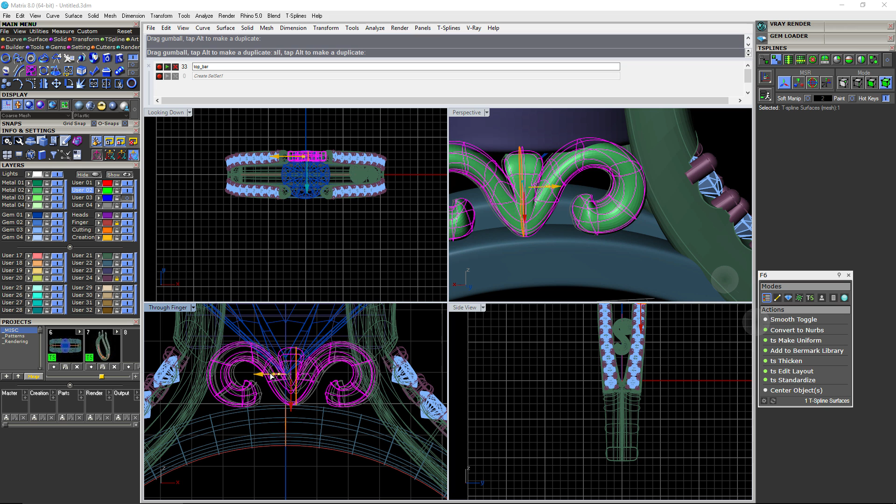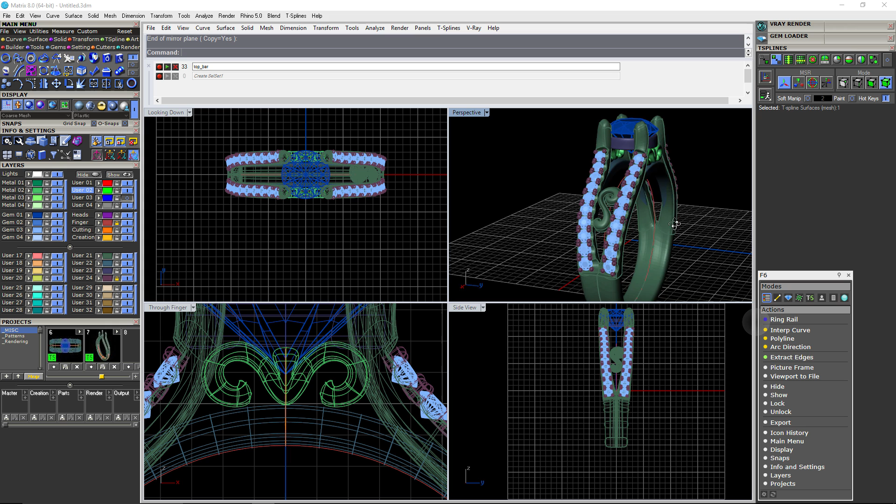So it's looking pretty good. Like I said, you can just keep adding more elements to it. Be pretty fun ring with all these different patterns and scrolls. Let's see, am I going to add more to it? Let's see, shanks. I must be talking about shanks.

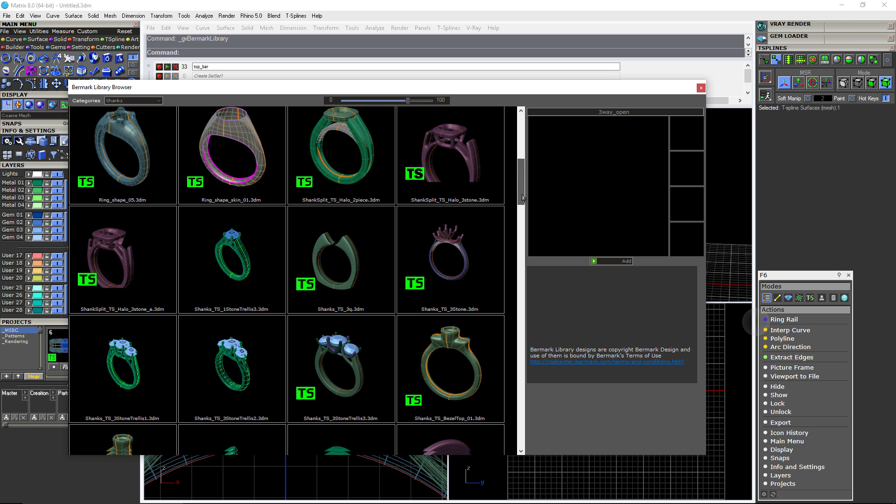Maybe just libraries in general, because I love libraries. They just work so well. Just can't stress enough how important it is to start a library if you don't have one, with just different shanks that are common that you just use and can just pull out. And it just saves you a lot of time. I have it with parts, libraries, patterns, halos. I don't even use the halo builder. I just pull out my own T-spline halos for all the different shapes.

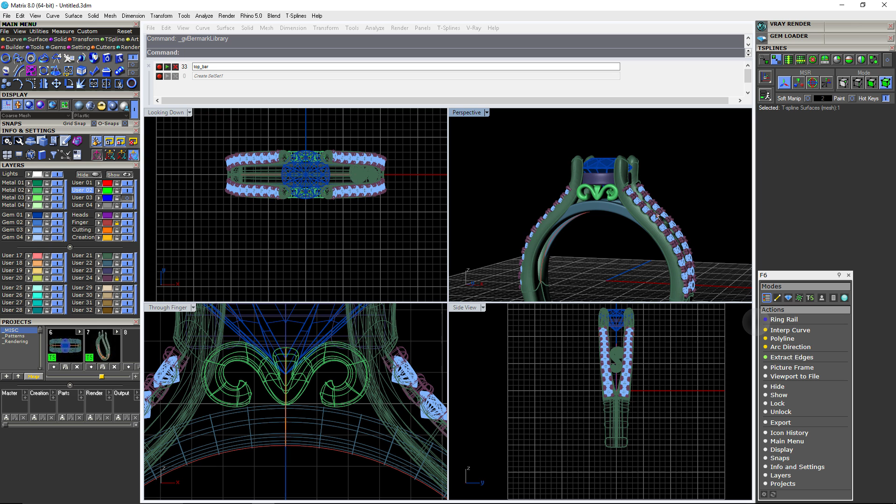It just works wonderfully. But yeah, just explore, tweak, design, and you'll have a great looking ring if you spend the time to do it right. Yeah, it's just having fun, and that's it. Hope you enjoyed this semi-tutorial. I never added those stone cutters, but that's another little part that you would need to do to finish up the ring, and just add those few more patterns. But that's good enough for this tutorial.

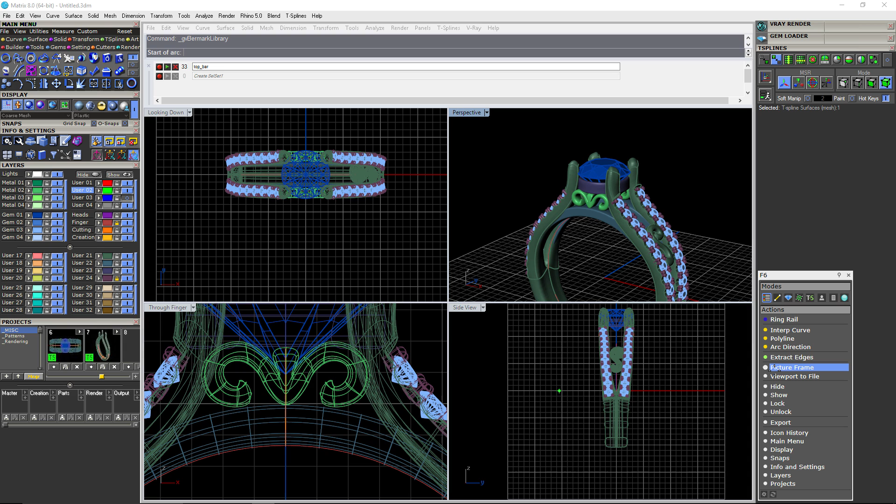Oh wait, can I do a PS? There's definitely a PS. There's another little spot I think would be kind of cool to explore here. You got one last part. T-splines is so adjustable. If you had really wanted to do a different style ring and be able to do that adjusting, you can do that. And one way is to take this shank, I'll delete it and put in the old T-spline one just for this instruction.

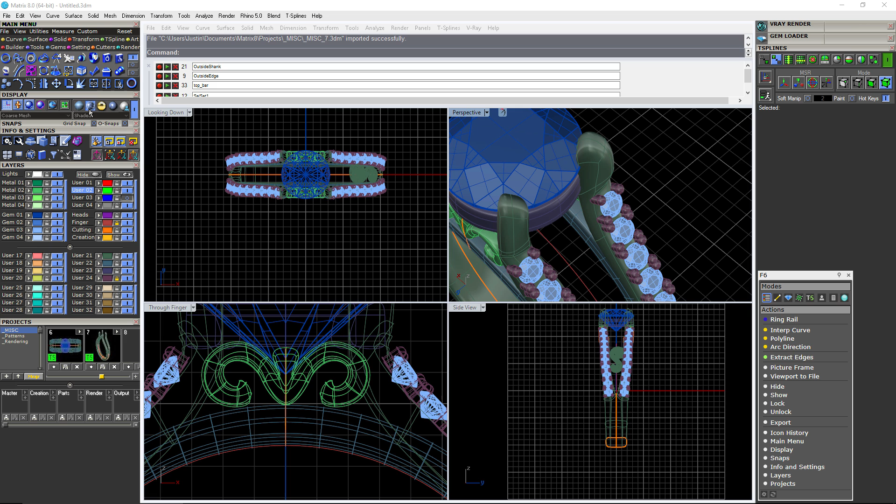There we go. And yeah, it's the old shank, but no big deal. So we'll take this one, and we're going to just take these two and bridge between them. And let's say you wanted, instead of prong set, more of a channel bar set. So just bridge, and forgot to say how many segments I wanted. Definitely too many, but that's okay.

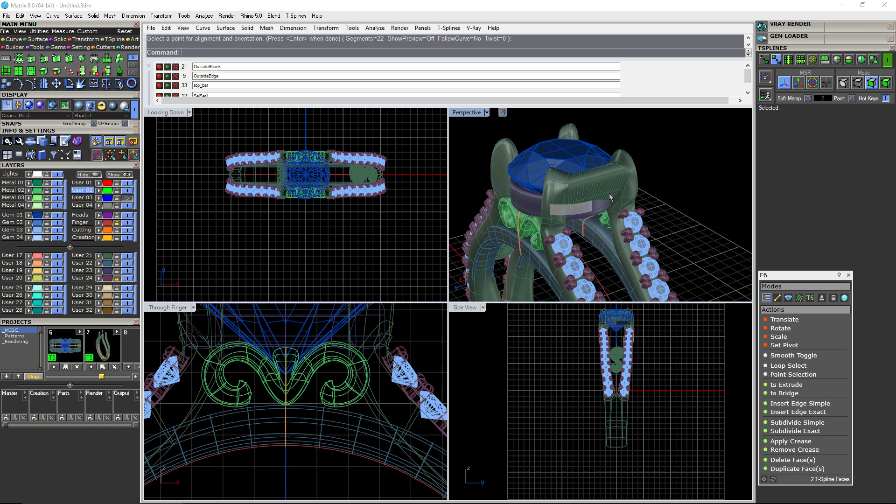And yeah, it breaks symmetry. You can always re-add it, but there are definitely too many segments there. But as you can see, it's something that you could do, and then if it was more simple, you could just pull it out and adjust it and make your little channel better, and curve it a little. But just a little PS, you can adapt these things to anything you want.